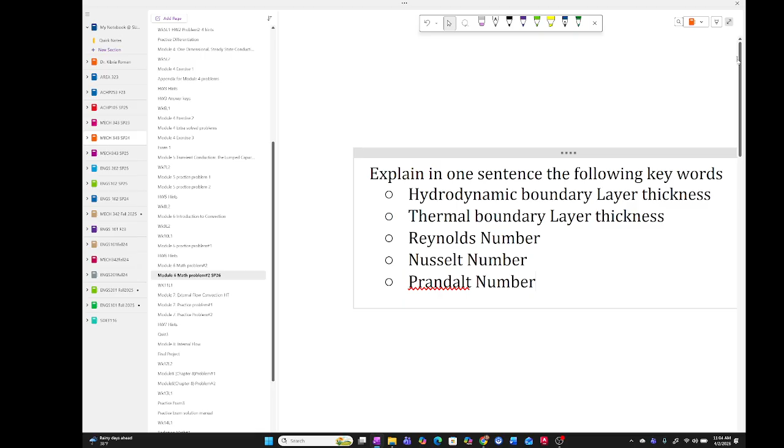Some record. This is a quiz. Okay, there are two questions. Just try to write it, whatever you remember. Okay.

Hydrodynamic boundary layer. That one is straight from fluid mechanics. You took fluid mechanics, you know it already, right? Last class I was trying to explain. Remember the boundary layer? That's the thing that I was talking about. Then the thermal boundary layer thickness. Remember, these are analogous to the hydrodynamic boundary layer, but it could be matching, it could be lower, it could be higher, depending on the fluid that is going on top of it, right? So that's the thermal boundary layer and the Reynolds number.

Okay, start the quiz. Reynolds number, Nusselt number, Prandtl number. Here I was talking about the Nusselt number. You do know the Nusselt number, right, everyone? Alright, the Prandtl number, I didn't talk about it that much, but if you watch the video lecture, you should be able to answer both of them. All of you watch the video lectures, right?

You should be feeling comfortable. Don't worry, I'm going to give you the benefit. Please take 5 minutes, okay? I don't want to bother you for the next 5 minutes.

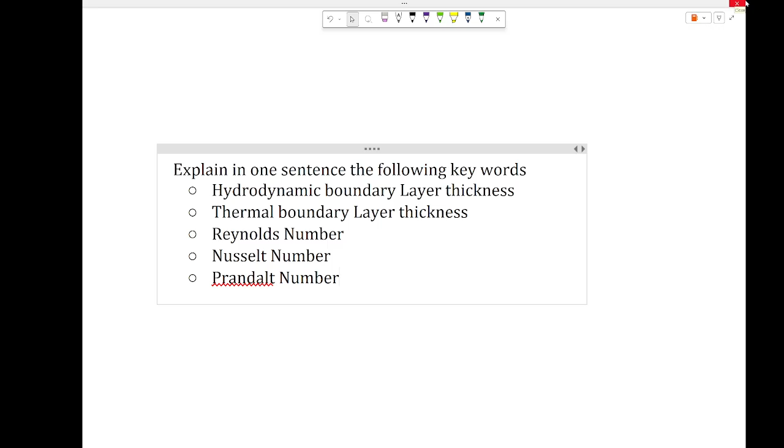Hydrodynamic boundary layer. You guys remember from fluid mechanics class? If this is the plate, and fluid is flowing on top of it with velocity u infinity, and this temperature is T infinity, and h is the convection coefficient, then there are two different kinds of layers. First one is the hydrodynamic boundary layer, and it has a transition where the Reynolds number equals the critical Reynolds number. Anybody remember the value? 500,000, right?

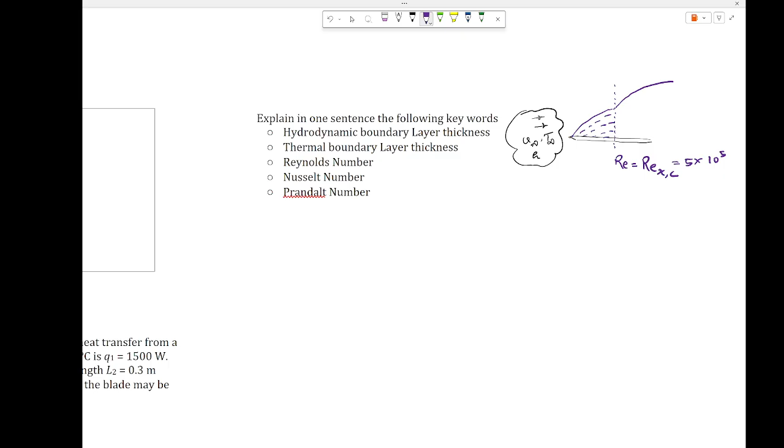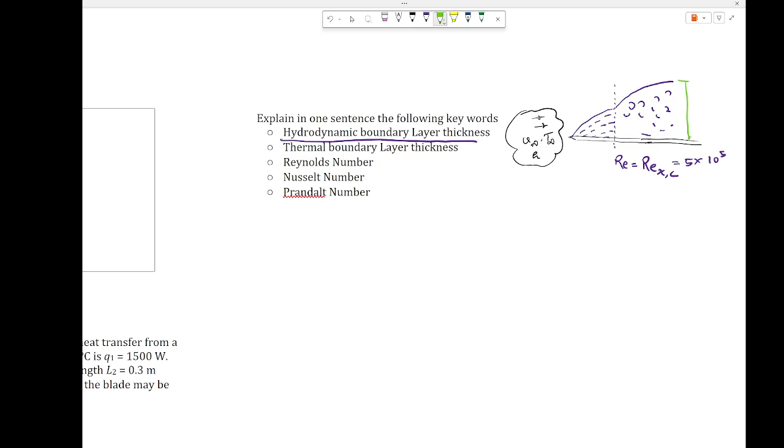So in this segment, for the hydrodynamic boundary layer, fluid flows in a much more orderly fashion. Do they call this laminar or turbulent? Laminar. And here the fluid flow is all over the place; this is turbulent, okay? So if you say this is my hydrodynamic boundary layer, you can call it delta. That's what they use for the hydrodynamic boundary layer.

Now the thermal boundary layer is something very similar to the hydrodynamic boundary layer, but it may match it, it may be lower than it, or it may be higher than it. That is dictated by the Prandtl number, okay? You've watched the video lecture, right? I thought I explained that. So the Prandtl number dictates that.

So what I'm trying to say is, you have this thermal boundary layer. It could be something like this, or something like that, depending on the Prandtl number. It can be anywhere, depending on the Prandtl number, obviously. And the symbol they use for this is delta T.

Now the exact definition of both hydrodynamic and thermal boundary layers: for hydrodynamic, assume the velocity u infinity is the free stream velocity. Everyone remember the free stream term from fluid mechanics class? What is free stream velocity? It is the velocity that is flowing freely, right? So if air is flowing freely on top of this, what will happen here because of this boundary layer?

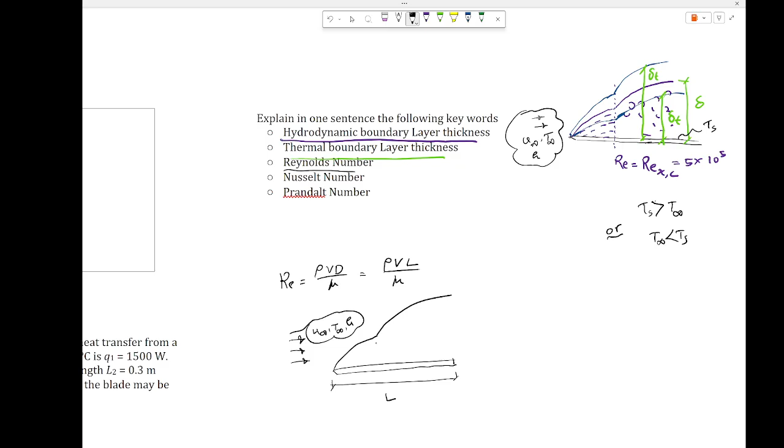So anyway, U infinity, T infinity, and H. Those things you always want to put over there. And then this boundary layer thickness, I don't want to repeat the same thing, I'm just quickly writing it. Say this is the hydrodynamic boundary layer, right? This L, this is the flat plate. So when you're dealing with the flat plate, this L or X is important. So Reynolds number goes with this term, okay? When you are dealing with, say, internal flow.

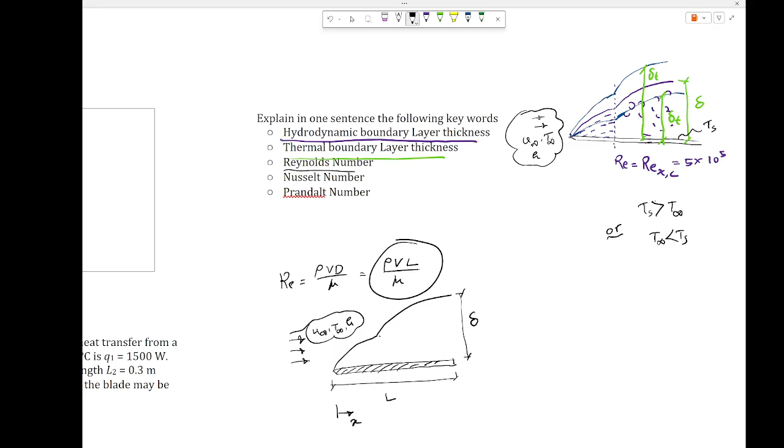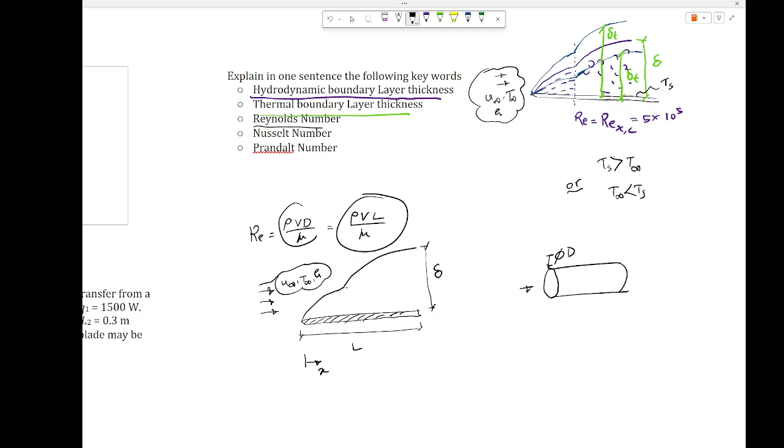Excuse me, that's the diameter, right? And now you're dealing with this. Make sense? All right, perfect.

So this Reynolds number is done. Any question? You remember that? It's inertia forces versus the viscous forces. What does it tell you? If you have a high Reynolds number, that means obviously the inertia forces overdo the viscous forces. Does it make sense? Means the velocity is really high, means the flow is really high speed flow that is flowing on the top of it.

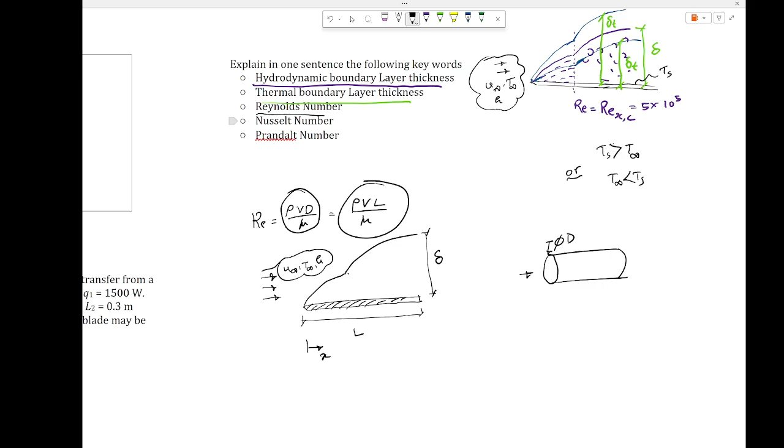Okay, then the Nusselt number. David, did I explain those Nusselt number, Prandtl number in the second lecture? You watched the second lecture, right? Did I explain those over there? Logan, did I explain those? I didn't explain the Prandtl. Okay, no. All right, let me explain.

Okay, so the Nusselt number. So let's talk about the Nusselt number. So the Nusselt number is, remember, HL divided by K. That's the same as the Biot number. Okay, this is the same as the Biot number. So this L here, what is this L? What do you think, Isaac? The L should be same as like the Reynolds number L, right?

Make sense? Okay, so now I'm gonna say write the Nusselt number for internal flow. Can you do that? What you'll be doing instead of the L, you'll be putting what? The diameter. Make sense? Do you understand? So that's what the Nusselt number is.

Now, while you are dealing with that, remember that our ultimate goal is to find the value of the H, so we can find the heat transfer, right? So to find the value of the H, if you can somehow find the relationship of Nusselt number, Reynolds number, and Prandtl number, and able to solve the value of the Nusselt number, and from there you are able to solve the value of the H, then you're golden. You can find the value of the Q.

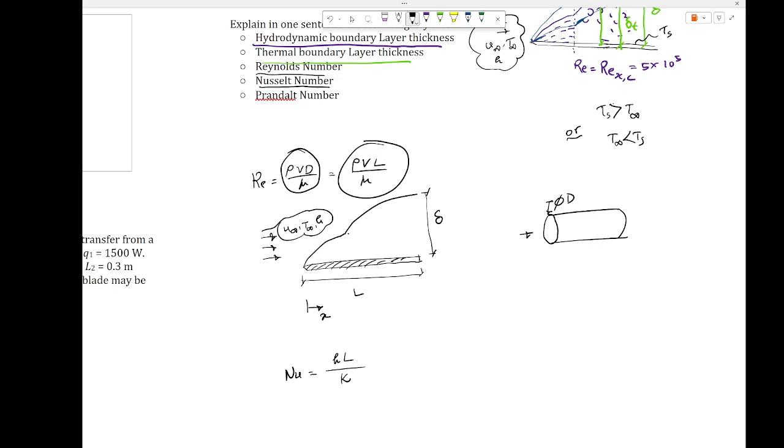Okay, any question with the Nusselt number? Everyone understand it? Kind of, I guess. So this can be also written as what? H D over K. You understand that? And then you'll oftentimes be seeing they put a D as a subscript and they put a L as a subscript.

Now, the other very important thing that I would like to cover is H. Whenever you don't have a bar on the top, that means it's local. How do you remember what is the local H and what is the average H? What is the difference? Last class, my vocal was so... Anybody remember what is the local H? What is the local H? At the point of interest, right?

Say like, everybody please watch what I'm trying to show. Say the H value I'm trying to find, on the top of this plate, right? So at any point, the H value will be different. Does it make sense? You understand that? Because at any point, the boundary layer is different thickness, right? If the boundary layer is different thickness, that means the H value will be different.

The boundary layer means what boundary layer? Is it the thermal or the hydrodynamic? Which one? It's always been thermal, right? It has something to do with the thermal. If there is no temperature change between the plate and the gas that is flowing on the top, there is no heat transfer, there is no H.

You understand that, right? But if there is a change of temperature, then the thermal boundary layer will change. And why is it changing? I said, because of the boundary layer, it is changing. So every point, the H value is changing. You understand that? Okay, so now that you understand, at every point H is different. That's called local H, and that goes with this Nusselt number. You see the H that I have over there doesn't have a bar on the top. Now, what if you are interested to find how much of the total heat transfer happened?

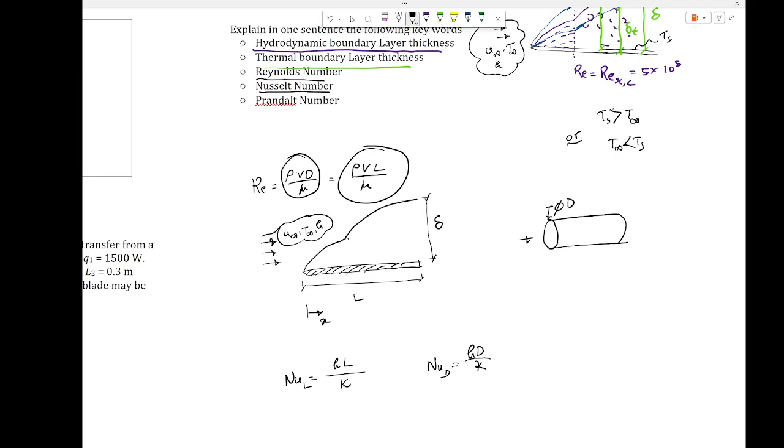Okay, come back here. So these are local, they call this thing. Everybody write this. They call it local Nusselt number.

Okay, and then you can say like average Nusselt number. So when I'm saying average Nusselt number, you definitely want to write what I'm doing now, because in the equation manual you'll be seeing this all the time. Then you're gonna feel confused, what is happening. This is what's happening. Okay, so write it so you're gonna remember.

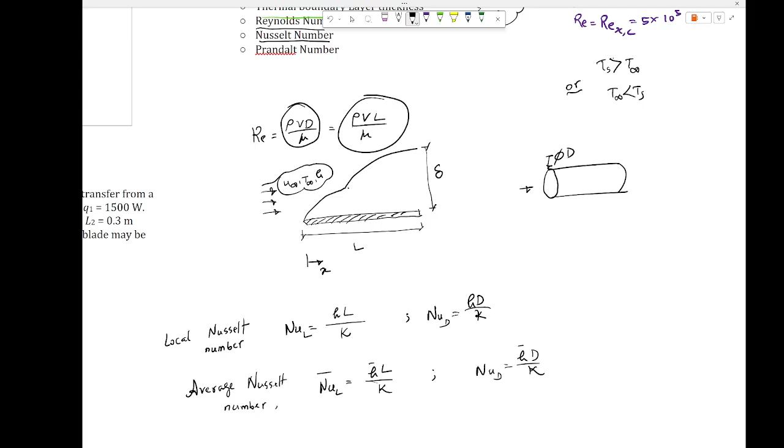Okay, so the other thing I want to write here: this H here is local HT. What is HT means? Heat transfer, right? Coefficient. H bar is average heat transfer coefficient.

The final thing left here is the Prandtl number. I didn't talk about it, I'll talk about it now. The Prandtl number, definition of that. If I don't learn more about it, I just want to discuss it. So you'll be dealing with this kind of thing. Please check.

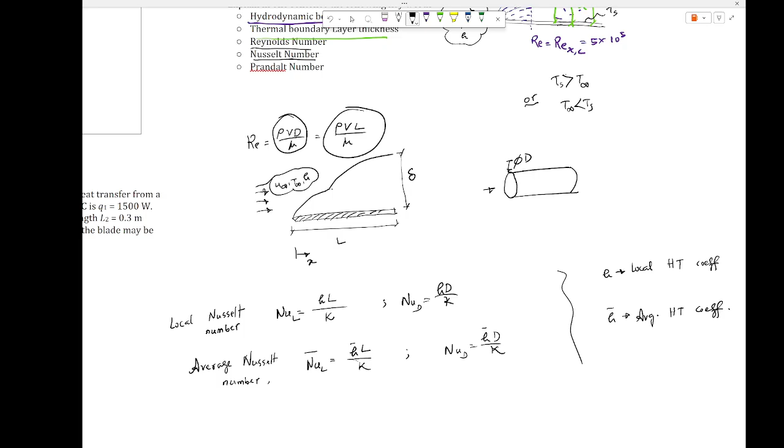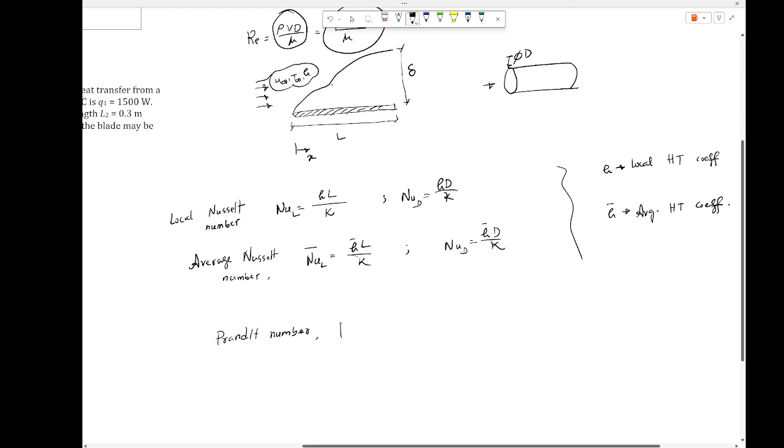I'll show these equations shortly after this. So the Prandtl number is a material property. So then the Prandtl number, PR, can be used: nu by alpha, yes, mu Cp by K, is the ratio of momentum diffusivity to the thermal diffusivity.

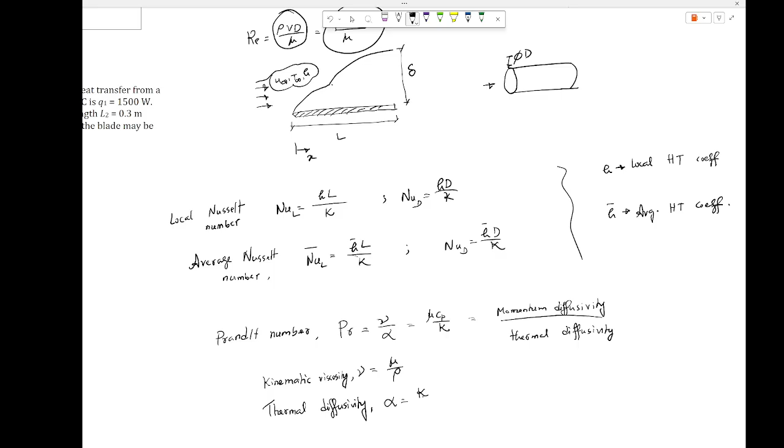So they call it momentum... okay, so this thing can be written as nu here, it's called kinematic viscosity. This nu can be written as mu over rho. Then thermal diffusivity, which is alpha, K by rho Cp, where this mu is dynamic viscosity. You know that, right?

And Cp is, what is Cp, Matt? Specific heat at constant pressure. All right, what is K, Isaac? Conductivity, right, they call it thermal conductivity as well.

So the Prandtl number, very important. Just remember it this way: it relates the thermal and velocity boundary layer. Anytime you see me writing BL, it means boundary layer. So it dictates whether momentum or heat transfer flows faster. Momentum means like the hydrodynamic boundary layer, right? So this is very important.

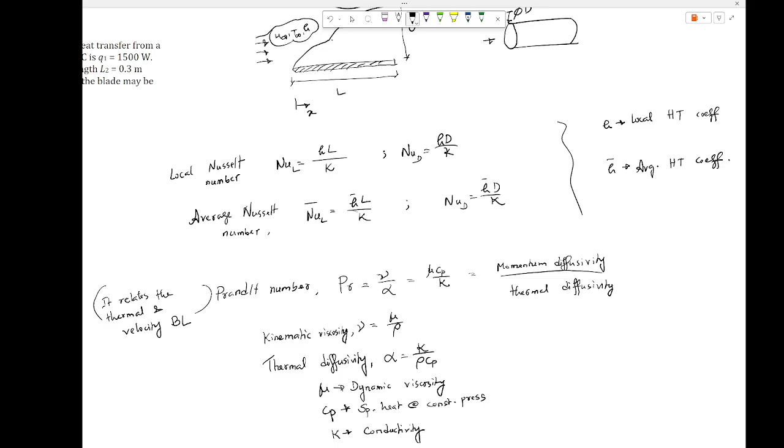Everybody feeling a little confident? Any questions with the Prandtl number? Remember, if anybody asks you what Prandtl number is, two things you say right away: first, it's a dimensionless number; second, it relates the thermal and hydrodynamic boundary layer. It tells you how big the thermal boundary layer is compared to the hydrodynamic boundary - you now know the boundary layer, right? I was trying to explain it the last 30 minutes or so. Feeling confident now? A little bit? Okay, now I'm going to show you some equations, and then you're going to feel more excited, because if you understand these equations, you can use them to solve the math problem. Let's do that.

And you see what I'm doing, I'm getting it from Brightspace, so you know where it's located and you have access to it. Do you see I created a folder called equation manual? Everybody see that, right? All right, so you want to open this convection.

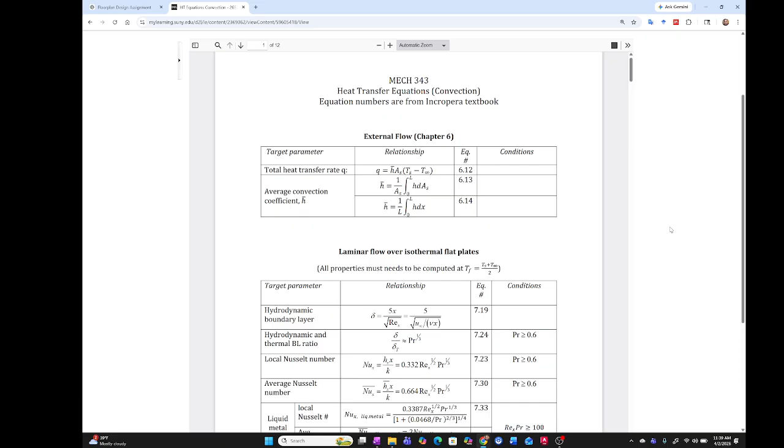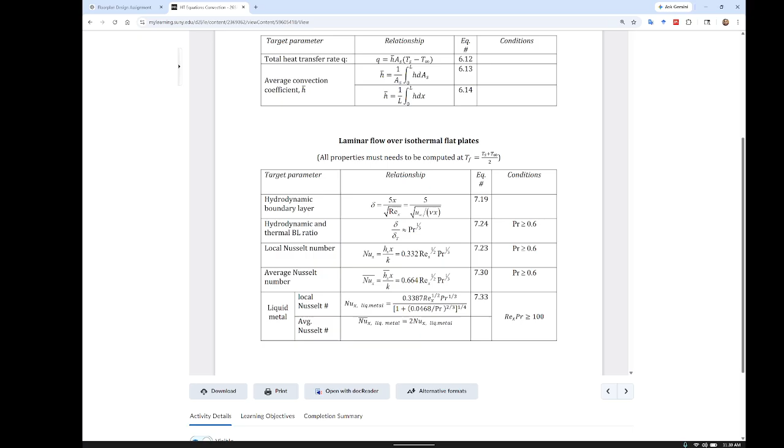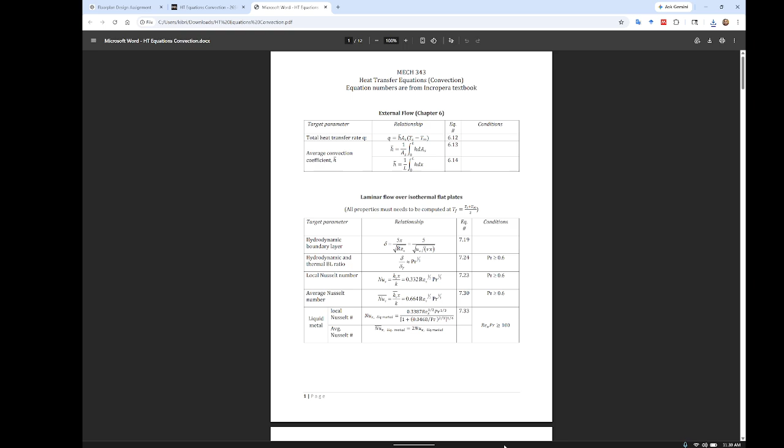This is where I'd like to pay my attention - these two equations. So these two equations are so important. Do you see these two equations? I want everybody to write these two equations, okay? No exception, everybody write these two equations.

And you can see the first equation is telling you how to find that delta - they call it delta. How to find that delta, and that is the hydrodynamic boundary layer. The first equation is the hydrodynamic boundary layer, right? So you see here, it's very straightforward to find the delta at any point. Remember that it goes for laminar and then goes for turbulent. If you're trying to find the delta value at any point on this plate, you have to know the x value at that point - from this side of the plate, like this is 1 meter, 2 meter, 3 meter, 5 meter, right? Based on this x value, you should be able to find the delta, how big it is. Once you have the delta, then use the next equation to find the delta t.

By using the Prandtl number value, okay? This is a very important question, and you should be able to solve homework problem number one without any issue by using these two equations. The right way, you should be able to solve it.

And the first equation, you know where it came from? Did it come from heat transfer? No. It came from which class? Fluid mechanics. Did you guys learn it in fluid mechanics? You might have, probably. You might have forgotten now at this point. And this is what you learned from fluid mechanics, the first one. The second one is an addition from the heat transfer class, where you know what the thermal boundary layer is, and you know the relationship of the hydrodynamic and the thermal boundary layer, which is governed by the Prandtl number.

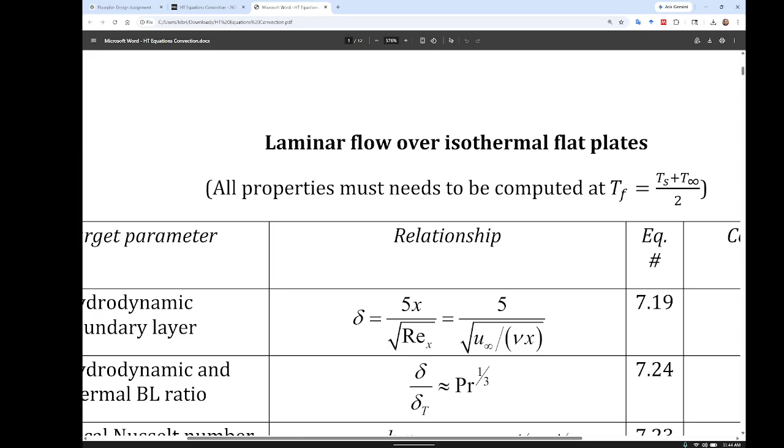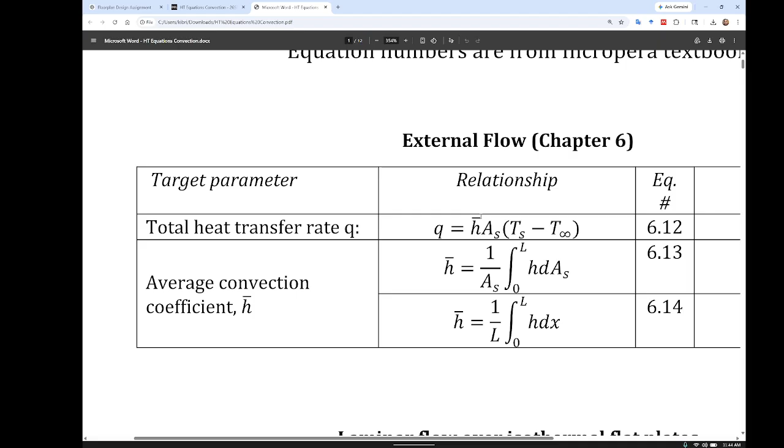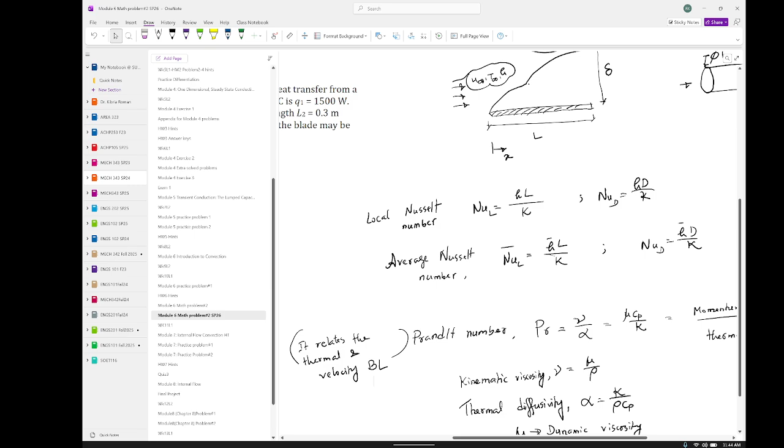The other thing is this equation. Remember, I was talking about this H bar, the total heat transfer rate Q, and the average convection coefficient H bar. Remember, I was talking about that. So these are here, these equations. Now I'm going to go to the actual thing, the problem itself. And before that, I'm going to explain this problem that you have learned in the video lecture, right? Everybody watched this problem in the video lecture, right?

And the homework. So the second problem in the homework is something very similar to this. Okay? Alright, so let's start with the first question that I have from Logan. Logan is saying he didn't understand the two C values that are given here. So these two C values, by the way, are constant, okay?

And the H values are given for laminar and turbulent. Those are referring to the local heat transfer coefficient. When it says H laminar and H turbulent, remember the boundary layer is like this, right? Because the boundary layer is different, the H value is different at different places. So that's the local. Now, the laminar section is up to this, and the turbulent is different, forget about it. So the laminar itself, right?

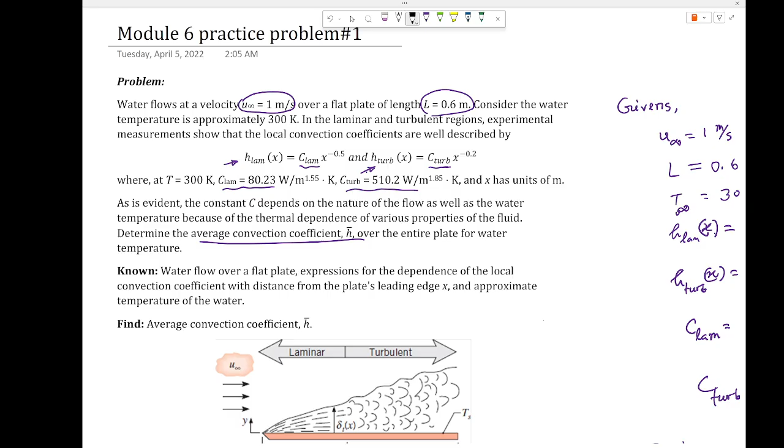First of all, lots of givens here. The water flows at a velocity u infinity of 1 meter per second. The plate length is 0.6 meter. Consider the water temperature approximately 300 Kelvin. By the way, notice that it's not air but water flowing on the top of the plate. Any practical application come to mind? Water kettle, right? Any time you have water flowing on top of a surface whose temperature is different from the water temperature, this is the scenario. Makes sense?

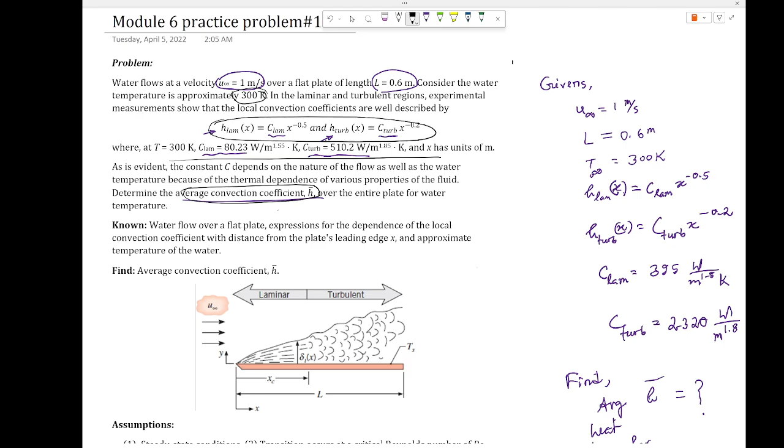All right, moving on. They said the water temperature is 300 Kelvin. For the laminar and turbulent regions they have this local H, and the C values, I did explain them. So they are asking to find the average H for the entire plate. In homework you'd be doing, and in the exam you'd be seeing, a similar question, so it's a very important one. All right, so I have all the givens here, and that's the thing that I'd like to highlight.

You also getting cold? Yeah. Also, this season is so bad. I can't sleep at night. I wanted to cancel the class again today, but I'm feeling much better vocal cord wise, like last time.

All right, so you understand that infinity. So U infinity, T infinity. What is the length? They said like 0.6, right? They have these two local H equations, right? They have these two constants on those two equations, right? They are asking to find the average H. You understand so far?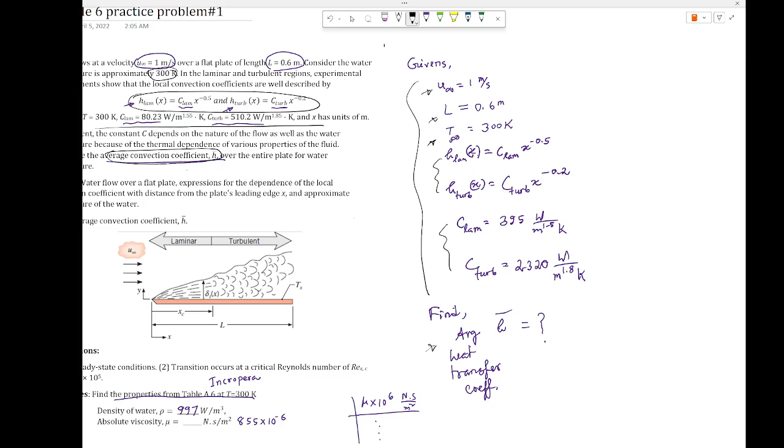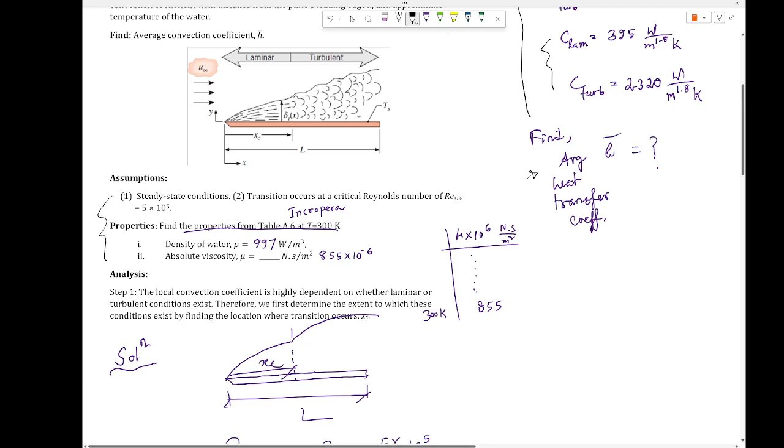Okay, I'm under the impression, because this was solved in the video lecture, everybody watched that video lecture, week 10 lecture 2 uploaded over there, right? So that would be the lecture that I'm doing now, week 10 lecture 2 part 2. So everybody should have it already. Okay, so then there are some assumptions, and again those things are also solved and uploaded in Brightspace for your reference. Just want to give you a heads up because you don't have access to the OneNote anymore. So I put it over there.

So you have the density of the water, absolute viscosity of the water. Why do you think you need those two values, density and absolute viscosity? Anybody, any idea? To find the Reynolds number, right? You remember the Reynolds number equation, which is what? Rho V D by mu, right? So these two, you always find from the appendix. These are properties, right? Mu or viscosity and rho.

And there's V. Don't get confused with the symbol, okay? Isaac, it could be U infinity or the V. The same velocity, okay? You understand? The V is usually used for velocity, but if you see like, okay, I have it defined as U infinity, does it make sense to find the Reynolds number using the U infinity instead of the V? Doesn't matter. It's the same thing, okay? It's the velocity.

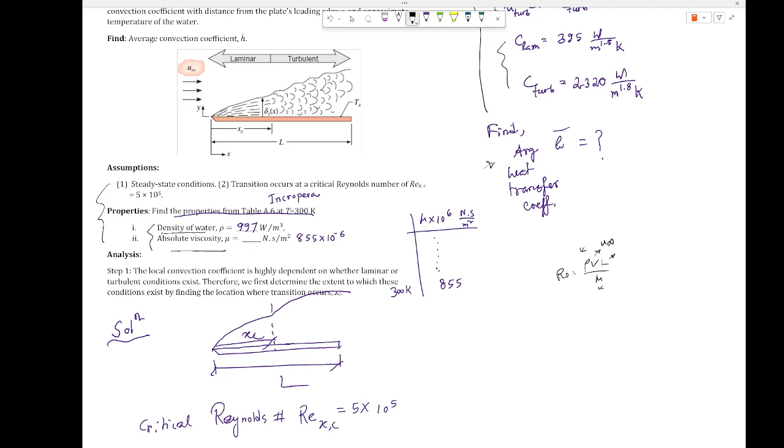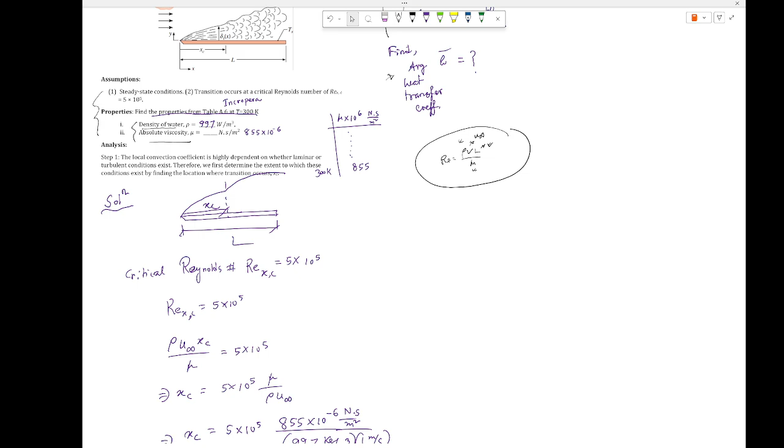Do you know the value of the L, the length of the plate? Yeah, I definitely know this. So can you find the Reynolds number? You definitely are able to find the Reynolds number. So why do I need to find the Reynolds number? They are so important. I did explain it in the video lecture, for those who watched it. So once you have the Reynolds number, then you can compare the Reynolds number versus the Reynolds number critical.

Matt, you remember what is the Reynolds number critical for the flat plate external surface? It's 5 times 10 to the power 5, right? That's the critical. What is the critical for? Local critical is for the transition where laminar to turbulent happens. See what I'm doing here. I'm finding the value of the XC. What is XC? XC is the position where the transition happens.

Okay, what is happening here? See, laminar, turbulent. If X value is 0 here, at this point it is XC. If the whole plate is 0.6 meter, so like at 0.43 meter, somewhere around here, right? The transition happens. Make sense? So to find the value of the XC, I need the value of the Re XC, or the Reynolds number critical, which is 5 times 10 to the 5. And by the way, in your homework, you'll be finding XC value as well.

Okay? There are 4 problems in the homework, right? So in the first problem, I said easy peasy, 2 equations you're going to use, right? You don't really need anything else. First problem, you can do by yourself. The second one is a similar problem to what we're seeing here, right? So to solve that second homework problem, you can do it by yourself. You don't need anybody's help, as long as you fill the little gaps on the integration. You need to know the integration knowledge.

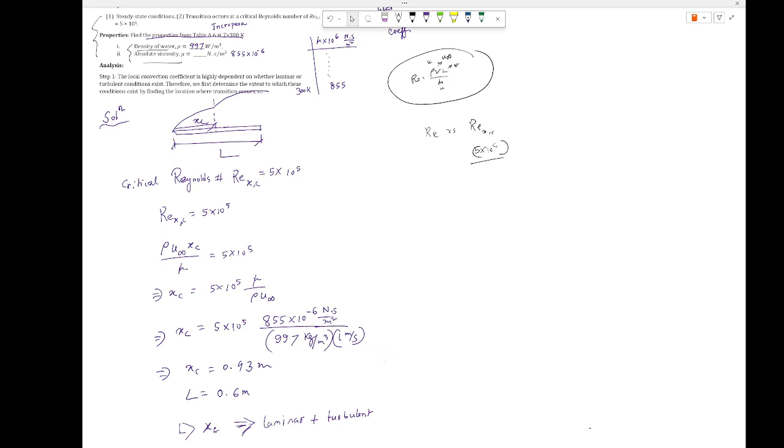All right, so laminar and turbulent. So this is the integration that you really need to understand. And just try to make it a little bigger.

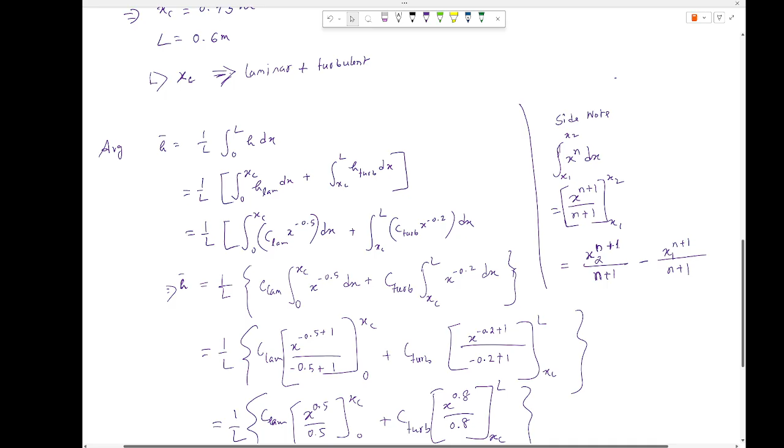I have a big math problem to solve. I don't want to do something hastily. I think I've given you enough theory today, right? So I don't really want to do something hastily and in a kind of undone way so you don't understand it fully. Rather you want to understand it fully, right?

Because I was not there watching, I don't know how much you understand. It's like the COVID period. During COVID, maybe only 10-20% of students were able to understand the whole thing. The rest of them were not attending at all. They didn't open the video lecture and they didn't open the video cam. They were probably wondering what this is. But I know by talking with them that they were not understanding.

Okay. So what's our goal? Our goal is to find the h or the average h. And I did talk about why: to find the Q, which uses the average h. Now, after finding the average h, we're going to do the integration because I

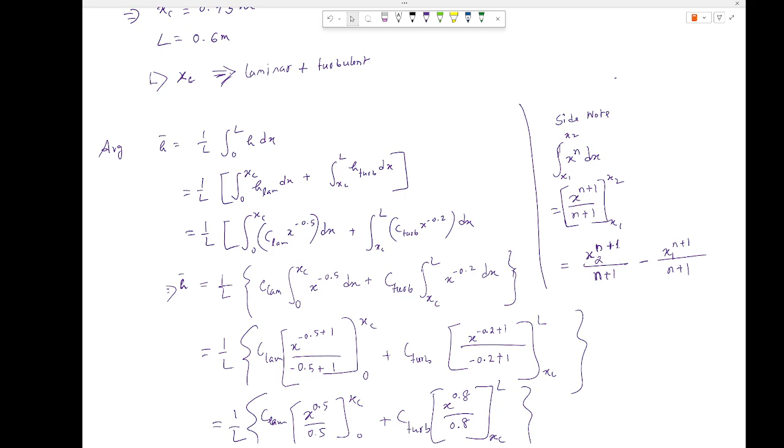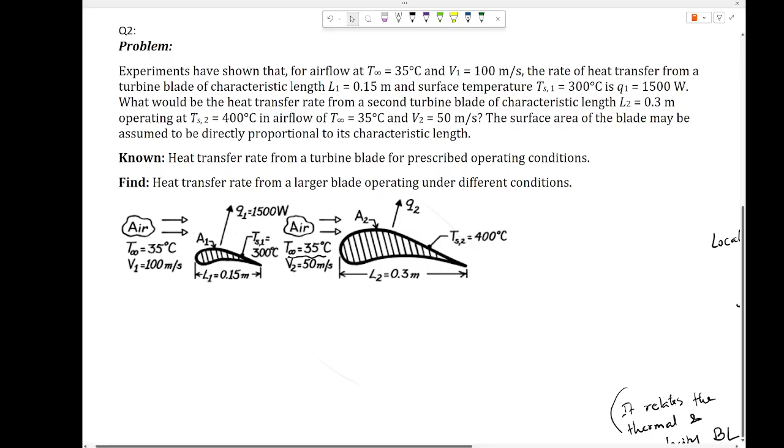Alright. Moving on. I do have some time. I know it's a long class, okay, but still, let's try our best to deal with another problem, this one I'm talking about. I have around 14 minutes left. That is probably enough to just give you the intro and at least do something about it.

I feel much better today because I was able to give you some understanding. In last class, I was not able to give you that much, and I was feeling bad, like you are falling behind.

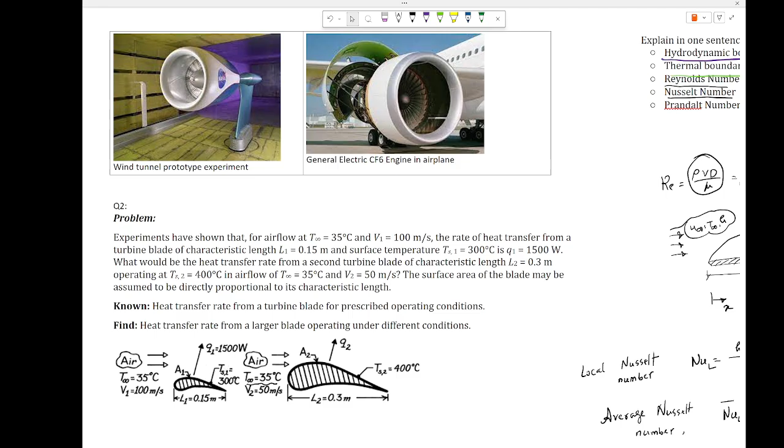Just 1 second. Okay, read through the problem. Everybody, please read through the problem, and start with the givens. All right, so let's read the problem. First of all, let me give you the intro of the problem, why you are doing the problem. By the way, there is a homework problem similar to this, the same one from the last homework, problem number 4.

So what are you seeing here? Why do we have a big wind tunnel here? Sorry, I said wind turbine. Do you guys know what the application of the wind tunnel is? Any university you go to has a wind tunnel, and they use it for research purposes and for class purposes as well. What do they do with the wind tunnel? Aerodynamics. They explore the aerodynamics, the fluid mechanics, in a wind tunnel, right? You at least have the basic idea.

But application-wise, do you know what the application of a wind tunnel is? You test airfoils or downforce. Exactly. Why do they test airfoils here? Because they need to scale it down, right? On the large scale, like in an airplane, the blades are airfoil shaped. You know that, right? And the engine. So big airfoils are really big, right? Have you ever noticed how big those are?

I mean, you notice, right? It's really big blades. So in a wind tunnel, I mean, they have large scale wind tunnels in a big lab. They actually have that big tunnel to test it real time. But usually in a small scale, in universities like ours and any other universities you go to, you'll be seeing a wind tunnel which is not that big, right?

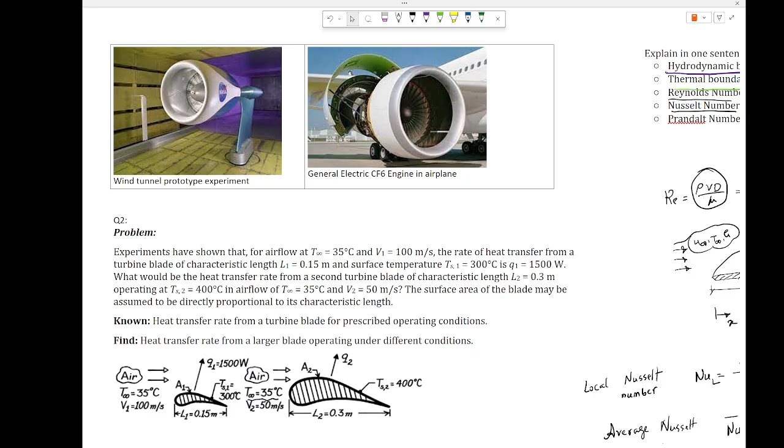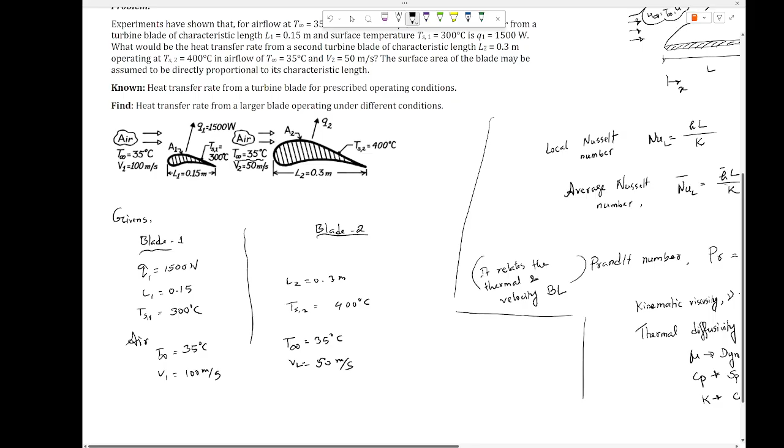So, givens. You have 2 blades, and when I say blade, that means turbine blade. On blade 1, Q1 is given as 1500 watts. L1 is given as 0.15, L2 is given as 0.3. TS1 is given as 300 degrees Celsius, TS2 is given as 400 degrees Celsius, and T infinity is 35 degrees Celsius. V1 is 100 meters per second, V2 is 50 meters per second. Okay, and these are the givens, what I already explained.

Okay, you want to take the notes and assumptions. I'm not going to do any solution, by the way. I'd like to keep it as it is, so we can start from here. So, steady state, constant properties. And number 3 is so important: the surface area is proportional to L, and that is given in the question. Surface area A is proportional to L.